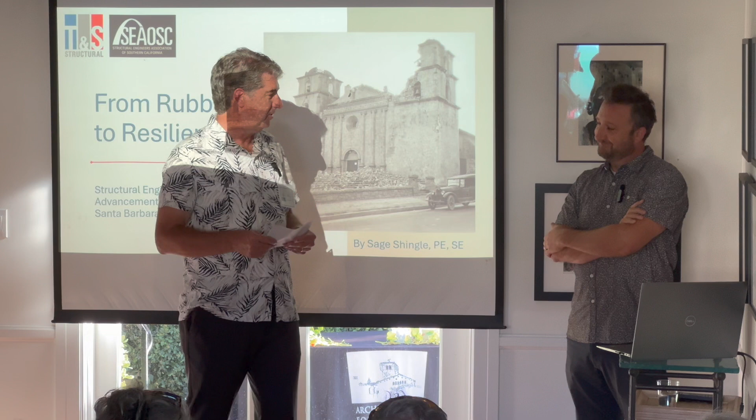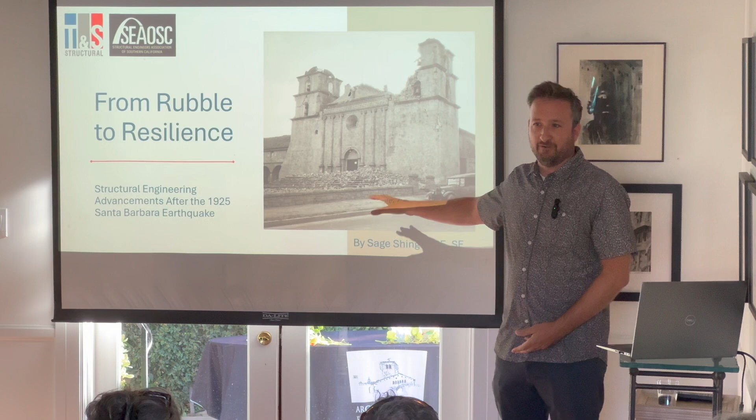All right, thanks, Greg. He mentioned there's no equations in this, but there is, I think, one. We're going to gloss over it for the most part. But a couple quick points of clarification on this. There's a ton of smart people that went into the background of this, right? I'm going to mention a couple, but there's so many people that have been involved in so many levels, so many years. So I'm going to just mention a couple, but that's it. There's so many.

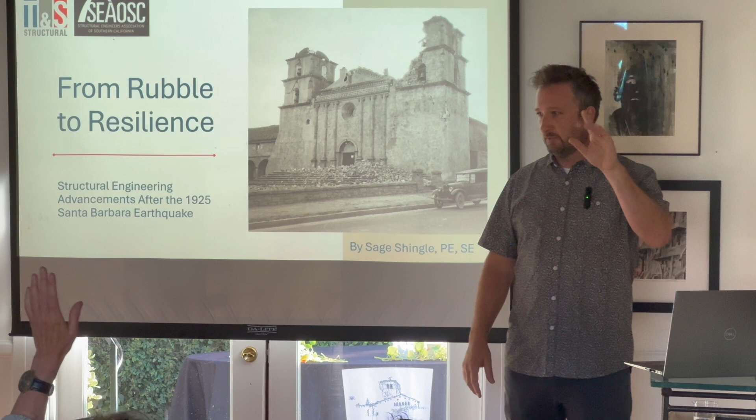Another thing here, I need one quick volunteer. Super strong. First hand. That was the first hand. Okay. So this is just a block of stone. You just have to hold it over your head for a little while. You can actually hold on, just verify that it's heavy. Let the crowd know. It's pretty heavy. It's 50 pounds. I actually weighed it last night. Oh, is that all? That's all. So that's gonna be important later in the show.

We do have a bunch of slides to get through, so we'll try to not linger at stuff. Otherwise, we'll be here for like 3 hours. But there's a ton of interesting stuff. I try to condense as much as possible. But here's the basic outline. We're going to just set the stage. So we're going to learn about earthquake engineering. We're going to learn about earthquakes. And then we're going to talk about the bread and butter of why we're here, the main event, looking at pictures of the 25 earthquake and why things failed, what went into it. And then we're going to follow up on how we're doing things different, what earthquakes have taught us over the years, and how we've evolved our building code to really become better engineers.

So Greg told basically a little about me, but I grew up here in Santa Barbara. Been doing engineering for quite a bit. Feel lucky that I kind of stumbled into something I really like to do. We all probably have hopefully a similar story, but yeah, and here's my family. Spend a lot of time with them.

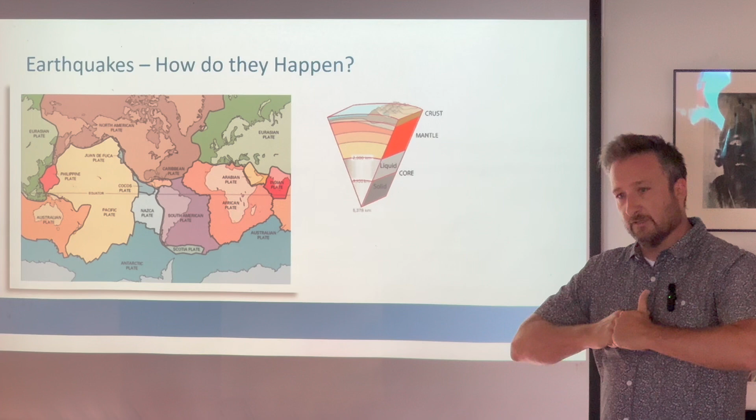So earthquakes, how do they happen? We know that the earth is composed of the mantle, the crust, plates are moving, and so if you think of plates moving as we all started with Pangea and we're moving out from there, you can interlock your knuckles like that and think of plates trying to shift across the knuckles. So as plates move, that's what causes our earthquakes. I don't see anybody doing it, just to make sure I'm right. There's one. So the rock is all interlocked, right? And so it builds up stress as one plate's trying to move by the next one. There's a buildup of stress, eventually released in an earthquake.

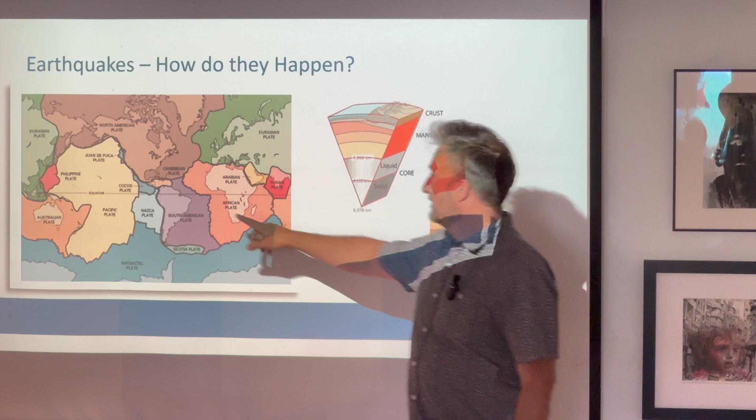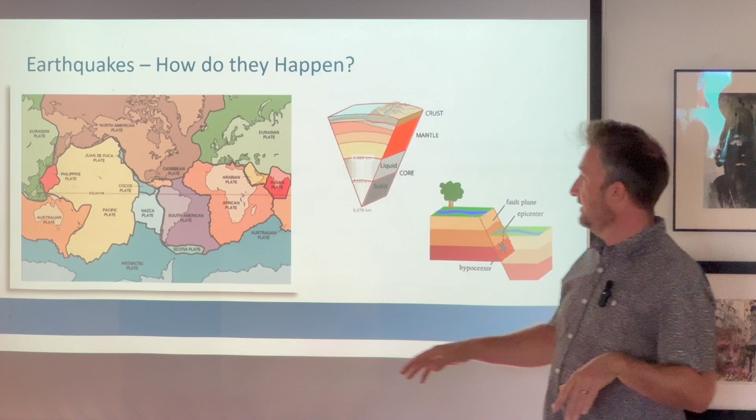So we know that there's fault planes all over the world, and there's actual plate lines. The plate line here close to us is the San Andreas Fault. So we're obviously right here. So maybe somebody's heard that in 10 million years, Los Angeles and San Francisco will be neighbors. So we're moving north because we're on the Pacific plate here, moving that way, versus San Francisco going that way.

So how do we know where earthquakes started? So there's two kinds of waves that earthquakes produce. P waves, which is just primary waves. So P is primary, super simple. And then S waves, the secondary waves. Again, super simple. But P waves expand and contract or pull the soil kind of like a slinky. My son told me that when I was telling him about this last night. So pulling a slinky and pushing a slinky and expanding it. And then S waves move the earth sideways and up and down.

So a P wave is faster than an S wave, which is actually an important thing. So if it takes 6 seconds for a P wave to get to you from an earthquake, it takes about 10 seconds for the S waves to get there. So there's a little bit of lag between when the first waves get there and the second waves get there. And the second waves are the ones that cause the majority of the damage.

So here's, seismograph is basically a measurement of how those waves are hitting the site. So you get your first primary waves come through, and then the secondary waves, and you start to get a big jolt. So that's kind of how we actually started to have seismometers across the West Coast, and then we can triangulate, knowing how long it took an earthquake to get to this point from this registry, same thing from this, and we can kind of figure out where it actually came from. It's super technologically advanced now, but that's the basis of it.

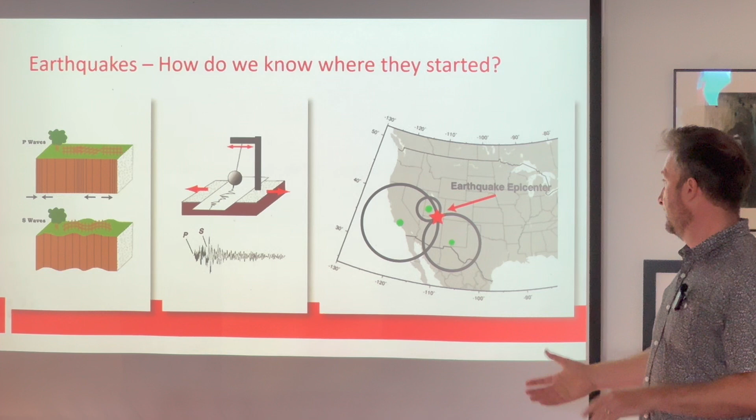And that P wave versus S wave, the primary versus the secondary, is actually something that we're now using to provide a slight early warning. So you can go to California's earthquake website and find an app you can download, and it'll give you a warning similar to the fires that we're doing now. And so it's not a predictor, right? It's not going to predict that we're going to have an earthquake in San Fernando in 2 days. It's a quick reaction, but the thought is this: because seconds matter, right? So if you can get a 5-second lead and be able to get to somewhere safe, then it may make a difference.

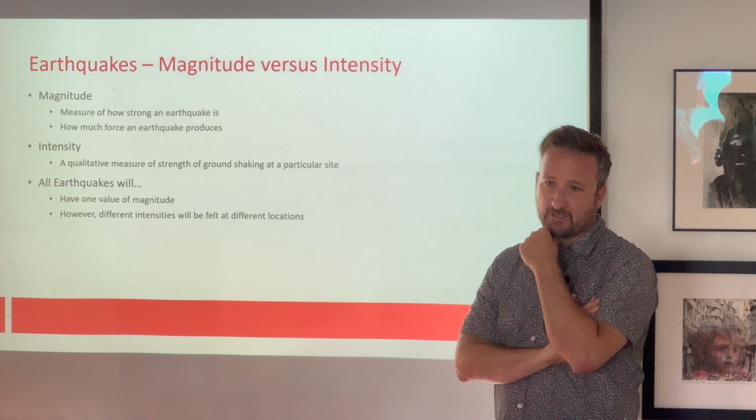So earthquakes, all earthquakes have a magnitude. This is what we're all familiar with, right? So when you hear an earthquake, you think, how big was it? That's the Richter scale, the moment or the magnitude of the earthquake. That's how strong the earthquake is, and how much force it produces, how much force it generates. And then all earthquakes have intensities as well. That's actually kind of a measure of how each site feels it. So one earthquake, maybe in Ventura, has a magnitude, and that magnitude is the same regardless of where you are, but the intensity varies. So if we're close to the earthquake, we're going to feel it a lot more than if we're in San Francisco.

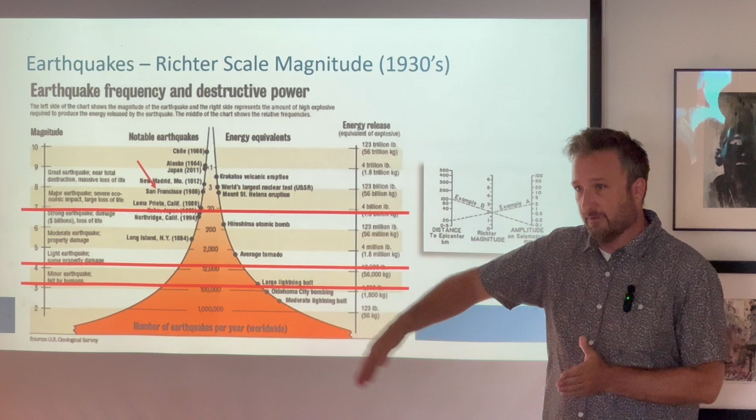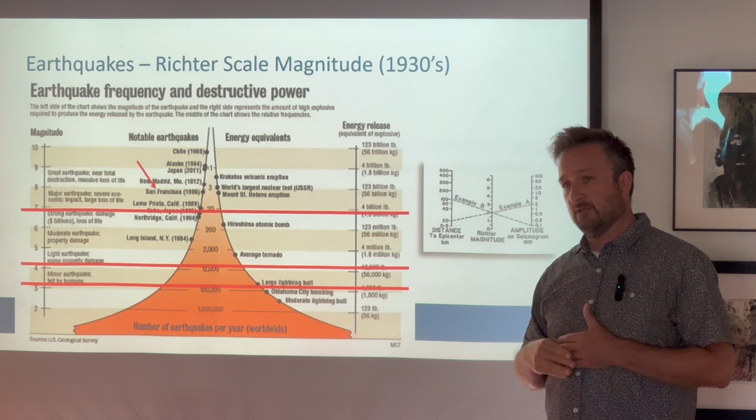Talking about the Richter scale, the older way it was done was basically measuring the amplitude of the shaking and how big that was. They would look at that and figure out how far away the earthquake was, and that's how they would dictate the magnitude.

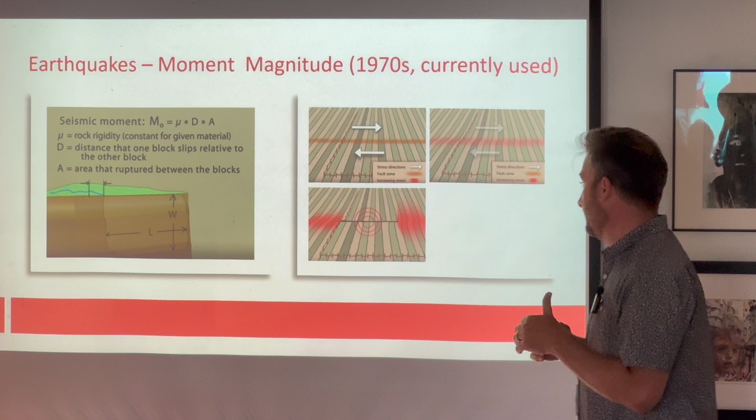They want to move, they build, they're getting stronger, they start to see a little bit of movement maybe, and then all of a sudden there's a release. That release causes the earthquake. There's an area that the earth actually shifts, so how much area shifts is how big the earthquake is. It's really the amount of rock, soil, whatever it might be that we're shifting.

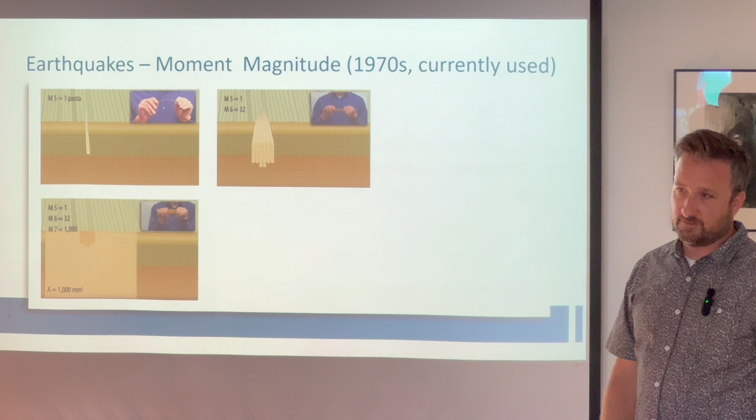Going up to a magnitude 7, we're talking about 32 times the already magnified 32, so we're up to 1,000 times what we started at. None of us have probably done this in the kitchen. Then jumping from a 7 up to an 8, now we're talking a ton of energy to try and break through.

Going up to a magnitude 9, which was the very tip top of that prior diagram, that happens just every once in a while, not often at all. I think in the roughly 250 years we've been tracking earthquakes, there's been about 15 magnitude 7 and up earthquakes in California. That's not earth-wide, but it certainly gives the idea that they're rare.

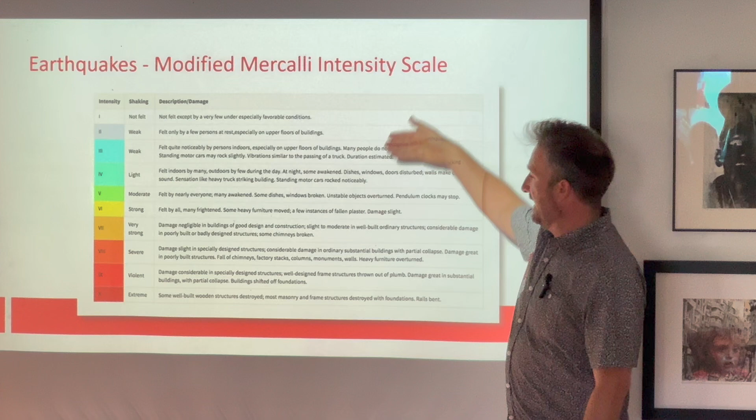The other thing we mentioned was intensity, the intensity scale. This is hard to visualize, but basically as you go down this list, it starts to get more violent, more severe. At the top of the list, it's 'we didn't feel it,' and then it increases from there.

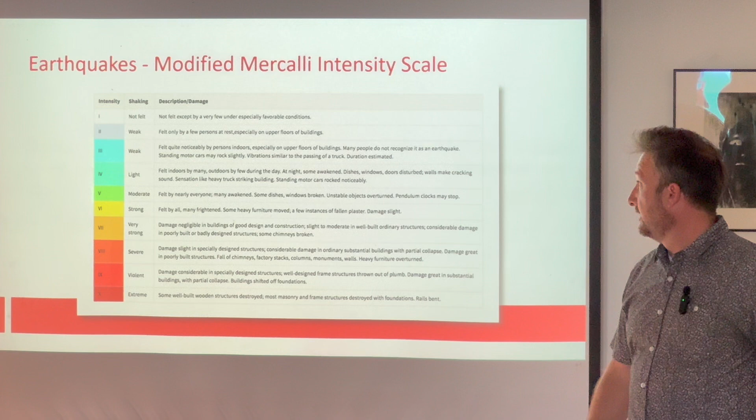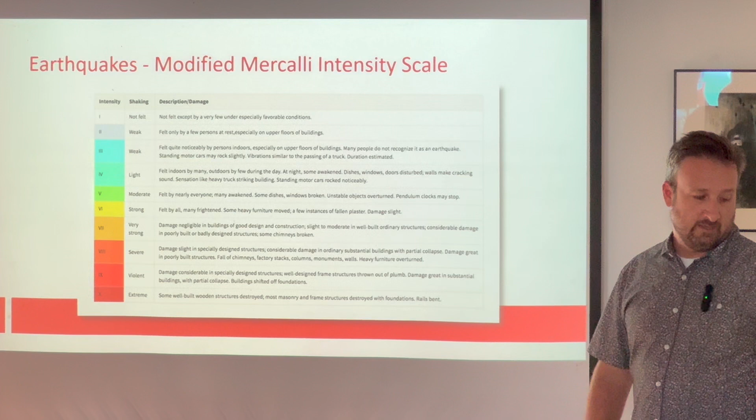This is actually used by the USGS website now, so anybody after any earthquake can go in and check how they felt the earthquake. It provides a lot of information.

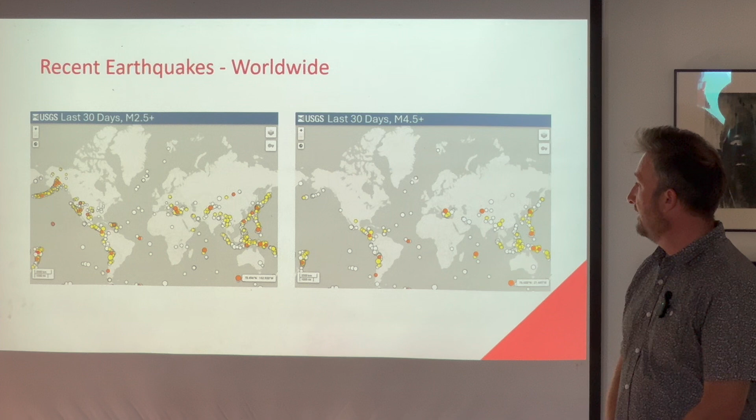Here's the United States Geological Survey website, anybody can go do this. So tonight, you guys can go look at the last 30 days from last night, this is how many earthquakes there were that were magnitude 2.5 or above. 2.5 was about that threshold where we said that's where you start to feel it.

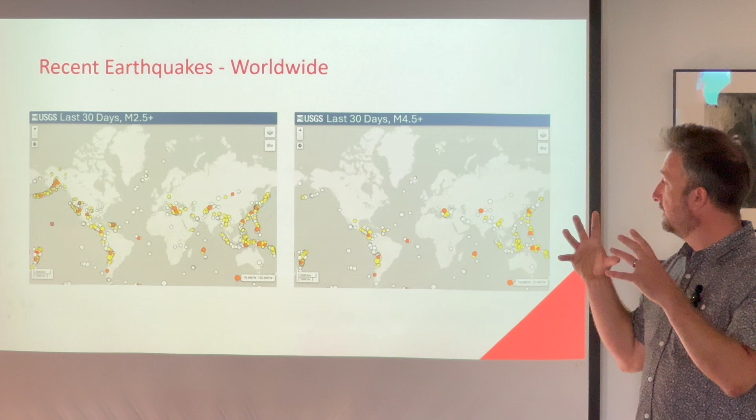In the last 30 days worldwide, number of earthquakes at magnitude 4.5, that's where you start to see some minimal damage. The color coding here is new is orange, not quite as new is yellow, and older is white. The size of the dot is the magnitude, as it gets bigger, it's a bigger magnitude.

So here's the West Coast, same map, just zoomed into the West Coast. This is all of the earthquakes in the last 30 days. This is all of the earthquakes that are feelable, at the 2.5 level. And this is the earthquake that was a 4.5, so at that causing damage level.

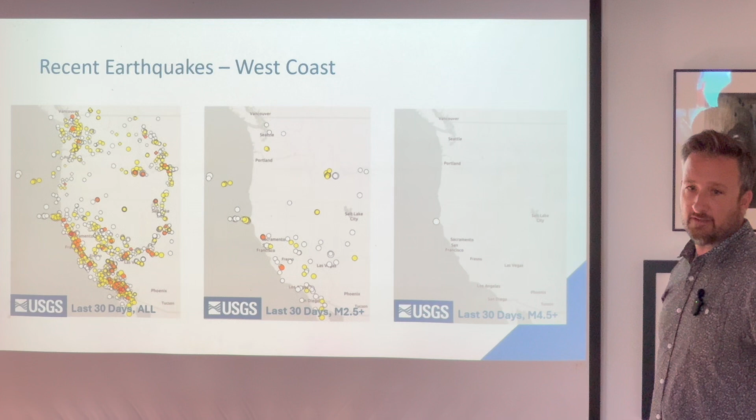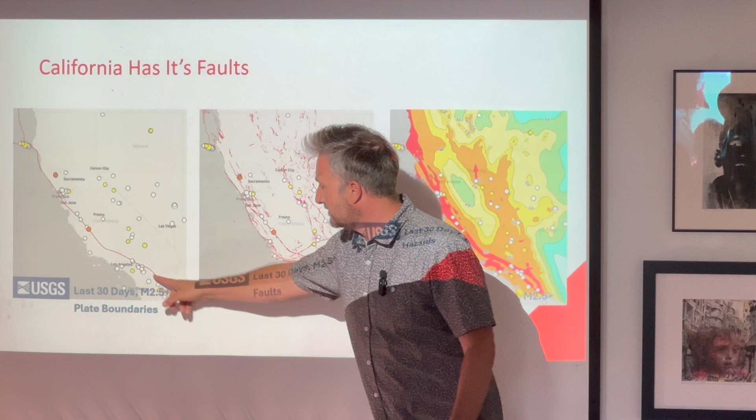A wise man once told me that California has its faults. This is the San Andreas Fault, this is the plate boundary. So this side is moving this way, this side is moving this way, going past each other. And then this is actually the faults across California, a big concentration along that San Andreas, but a ton scattered as well.

Over the years, we'll see a slide a little bit later that's a bit more dated showing how we used to look at earthquakes, but this is a current map that takes into account how close you are to earthquakes, to be able to design for an earthquake. So what these numbers are, percents of gravity, so if I'm holding this, right?

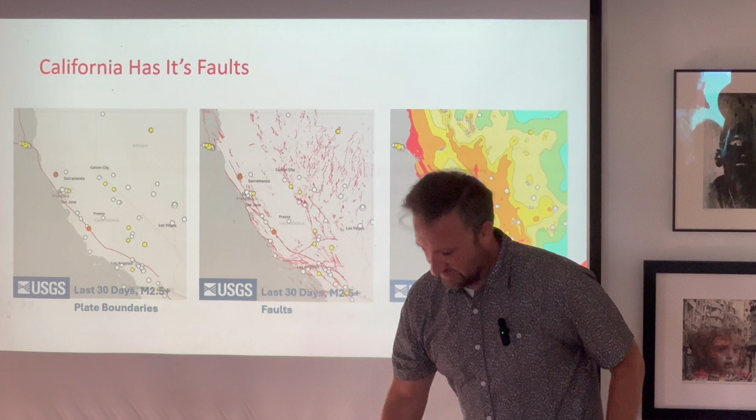So I'm holding this, and I'm holding 100% of gravity right here. Out in these red zones, you design for an earthquake horizontally at 80% of that force. There's some other numbers behind it, but that's the gist of it.

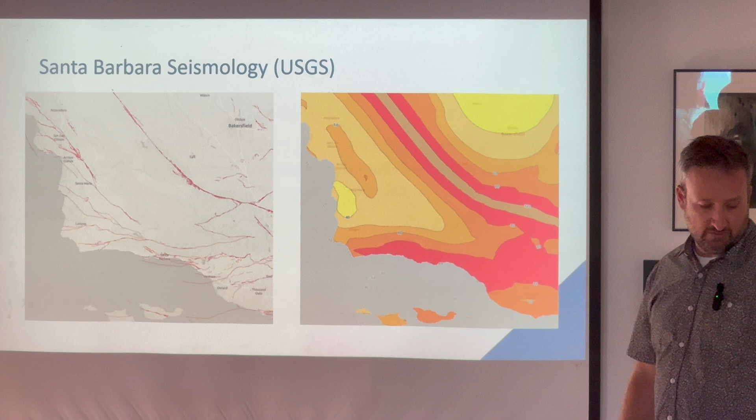As you get further away from the faults, we get down into smaller regions where there's not as much acceleration of the ground. So here's a zoom in specifically on Santa Barbara. Faults are around, and we're designing for big, heavy forces that are amongst the biggest in the nation.

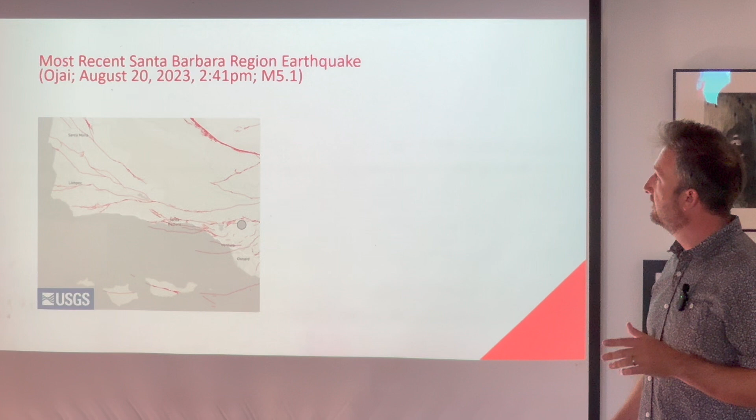If anybody remembers, this is the most recent decent earthquake in the Santa Barbara area. It was in Ojai in 2023, in the afternoon. I don't know what day it was, but you could feel it here in Santa Barbara. That earthquake was a 5.1.

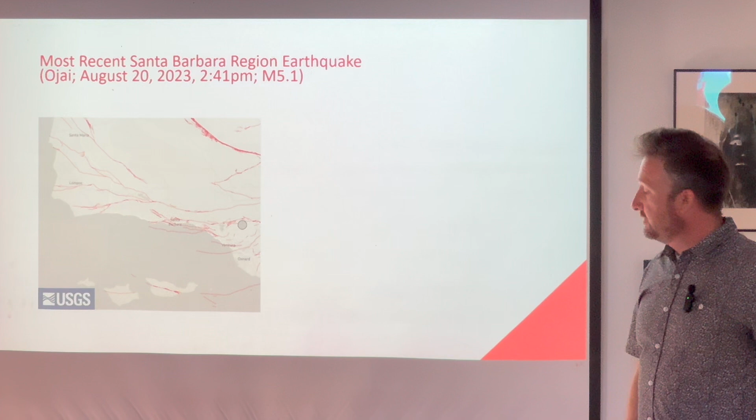So we're comparing this 5.1 to the Santa Barbara earthquake we're going to talk about, which is 6.8. From 5.1 to 6.1 is 32 times more energy, and close to 7.1 is 1,000 times more energy. So this is still at the level where you can feel the earthquake, and you can see maybe a little bit of damage, but not that substantial.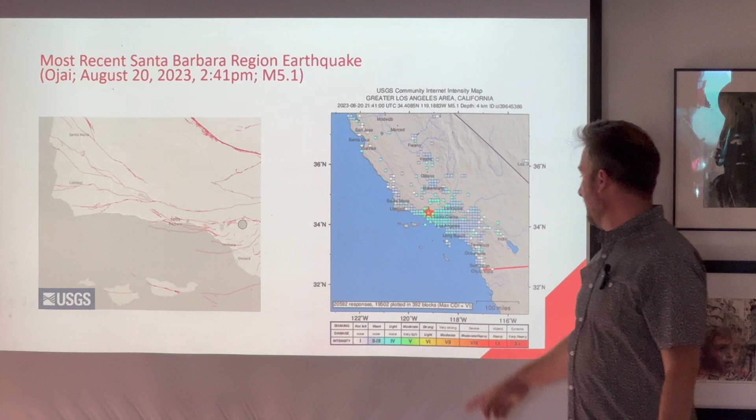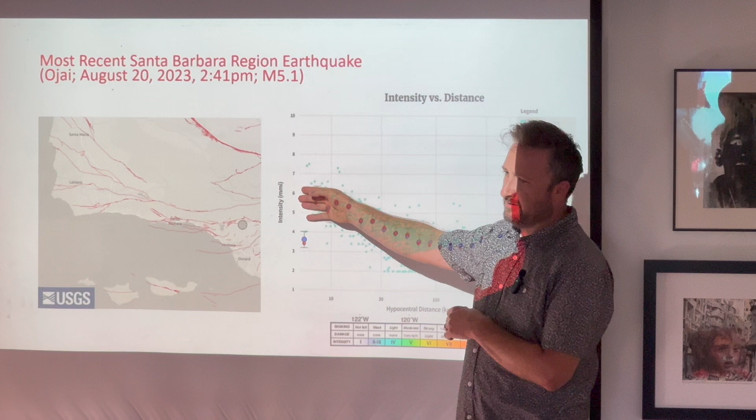This is a diagram taking all those points, all those people who entered their information, and cross-referencing how far they were away from the earthquake. So this is the distance from the center. All the people closer to the center felt more shaking, and this is how intense they felt it. When you get far away, they felt it not so much. They do this for every earthquake—if it's big enough for people to feel, it's on the website.

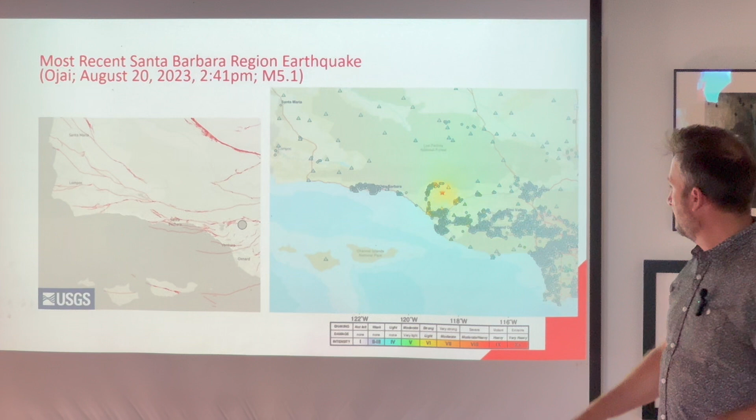Here's another diagram of it. But the cool thing about this, I think, is all these triangles. All the triangles are actually seismometers that register and pick up the data. All the dots are people, you or me, with a phone.

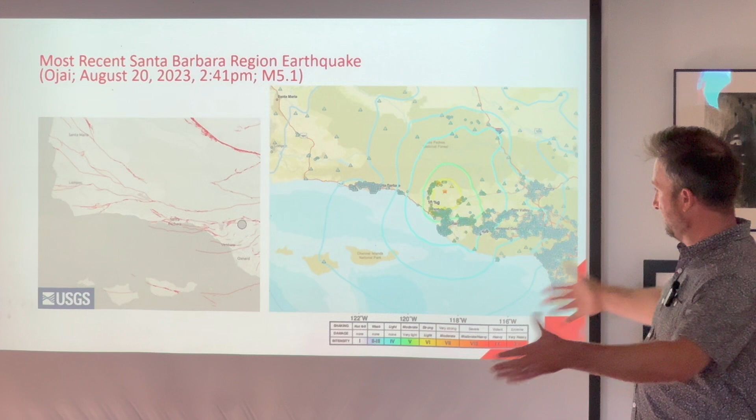Okay, so here's another guy, a lot smarter than me: Isaac Newton. Sir Isaac's first law of motion says an object at rest tends to stay at rest. Second law of motion is force equals mass times acceleration. So we talked about the mass—I'm not going to pick it up again—but we've got the mass, and the accelerations we were just talking about in the earth, how much it shakes.

So the way we're designing for earthquakes is taking the mass of a building and then applying some horizontal loads to it, some horizontal accelerations, to get the weight of the building and how fast that mass is moving, which gives us a force to design for. So here's your quick 30-second how-to-be-a-structural-engineer.

The earth shakes, right? It wants to shake, and so the building is going to move. This is kind of like the object at rest wanting to stay at rest—it wants to stay there until the earth shifts underneath it, and now it has to catch up and move with it. So it starts to shake back and forth like that as the ground is shaking.

So what we do as engineers is make sure that the floors and the roofs are tied to the walls around the building, locking them all together, so the floor and the roof will absorb the load and redistribute it to the walls, which take it down into the earth. That's the very basics of it. There's a ton more than 30 seconds' worth, but that's enough to understand where we're going later in the slides.

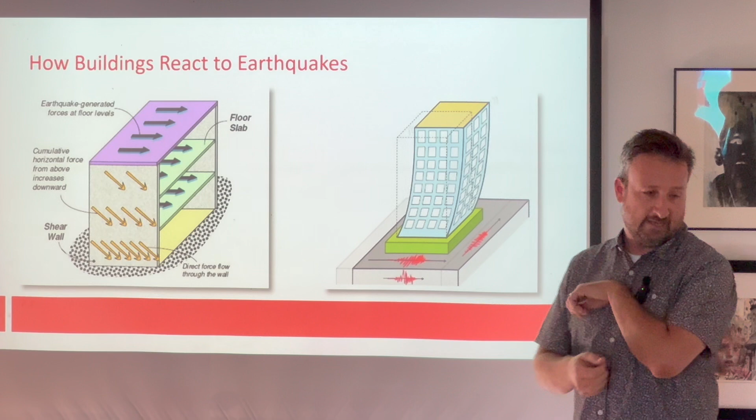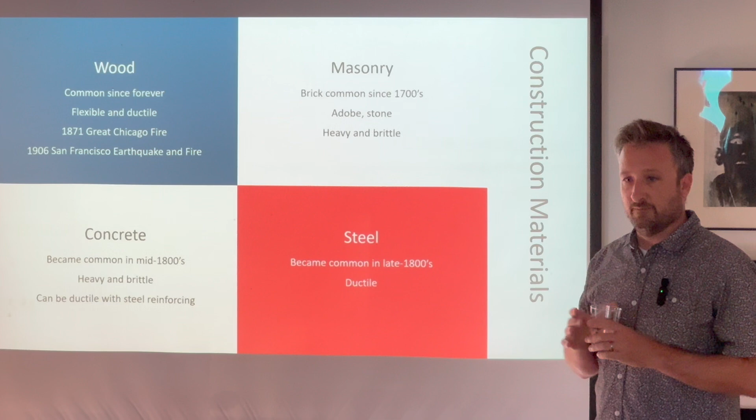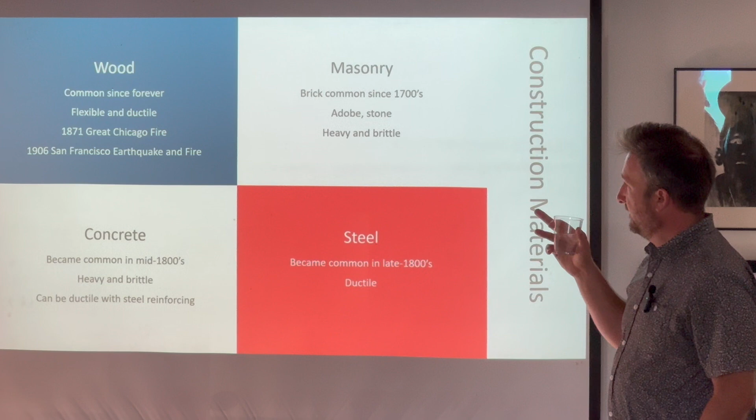So, talking a little bit about materials. These are our typical construction materials. Wood, everybody's been using it since we could make huts. The nice thing about wood is it's flexible and can be ductile up to a point.

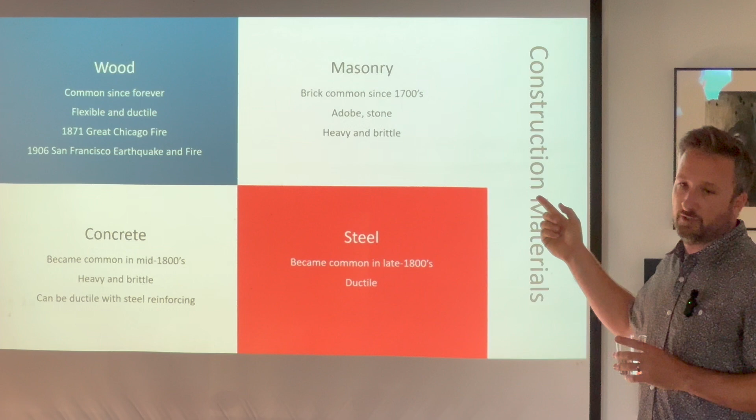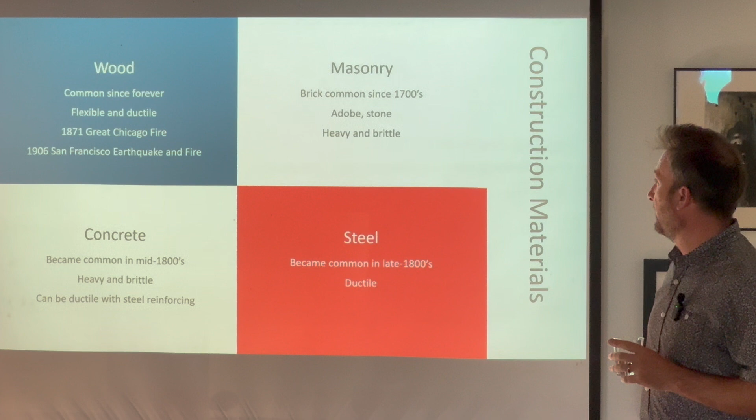But the bad thing about wood is big fires. If you think about people moving west, settling in a town, it was first wood structures, and then we got some affluence, into the gold rush, and we start to get masonry, big brick or stone buildings. Stone is a lot heavier, adobe here locally, and brick was common, but masonry is heavy and brittle. So if it's going to break, it's going to break, and it's going to break fast.

Concrete is similar in that it's heavy and brittle, but you can reinforce concrete with steel, making it a lot more ductile and able to dissipate energy. Steel, we didn't have a lot of in the earthquake, but it's a material that can be ductile if it's designed the right way.

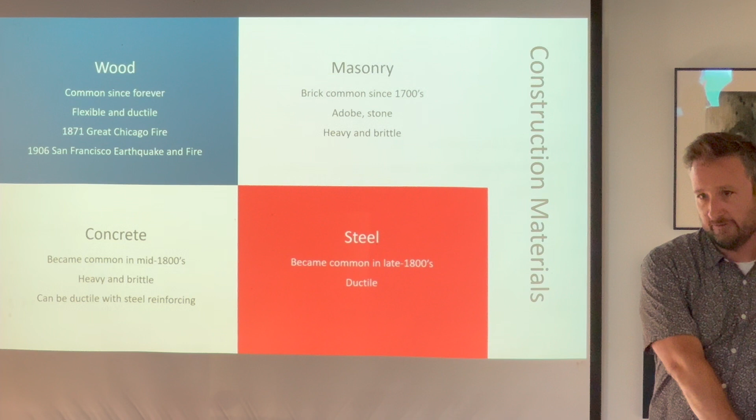Okay, so that was all the background. Here we go, main event.

Looking at the earthquake: the Santa Barbara earthquake was June 29th. Greg mentioned it was at 6:42 in the morning, which is an important thing actually. The magnitude was 6.8, so we're pretty high up on that ramp.

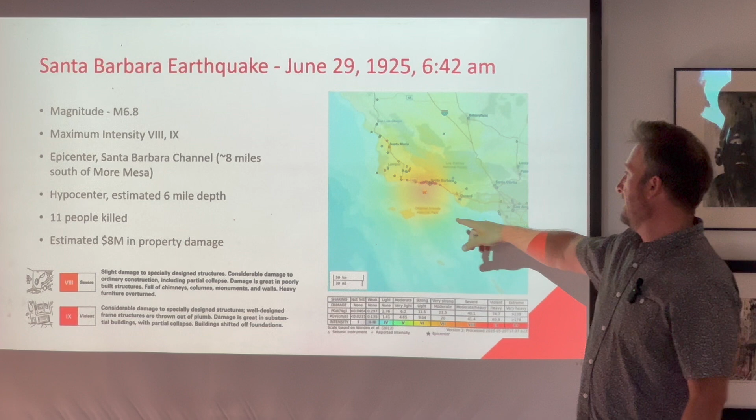So the epicenter is 8 miles south of More Mesa. You go out on the More Mesa Bluffs, and 8 miles south of there. And then the hypocenter, which is just how deep it is, was about 6 miles deep out in the channel.

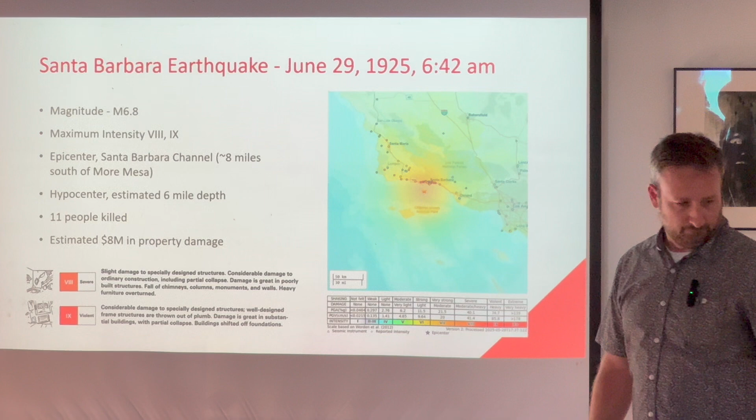I mentioned that seismographs weren't actually developed and used until the 1930s, but there is a recording of the Santa Barbara earthquake from a temperature measuring device from the Southern Counties Gas Company. You can see there was a little disturbance in the middle of the night, around 3 a.m., 3:30. Then here's where we get to the big activity, which was at 6:40. It's kind of neat to be able to actually see it.

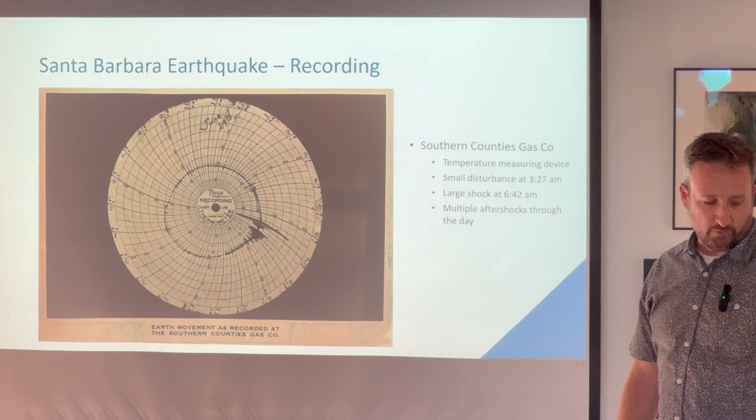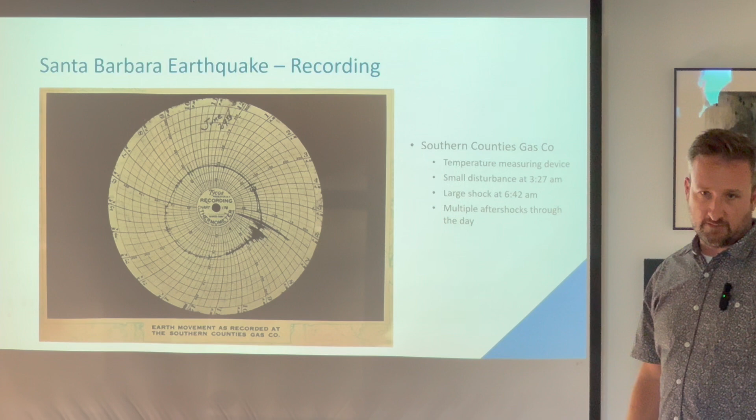That 6:40 timing was important because the downtown corridor really saw a majority of the catastrophic damage. But not as many people were living in the industrial or commercial space, so they were at home. We'll see some damage to residences, but they weren't as catastrophic or life-threatening.

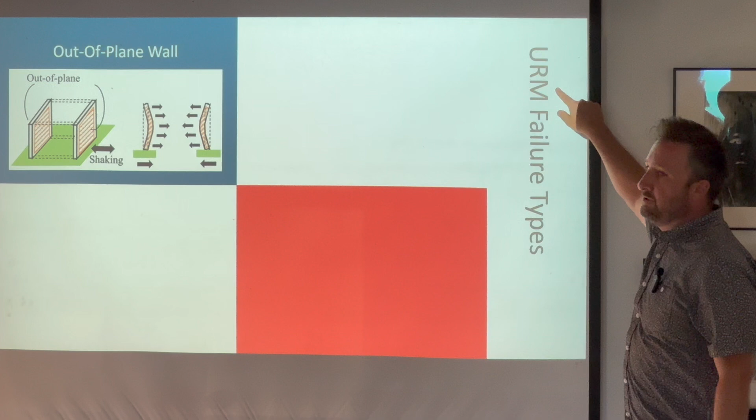Okay, so we're going to talk about URM—this is a big thing. Unreinforced masonry is what that stands for. So that's brick, stone, adobe that doesn't have steel rebar reinforcing it. Here's a quick primer on the types of failures we're going to see, because we're going to see a lot of them over and over.

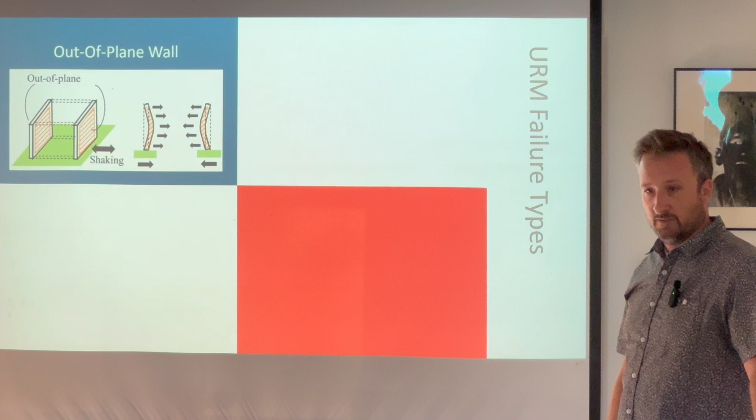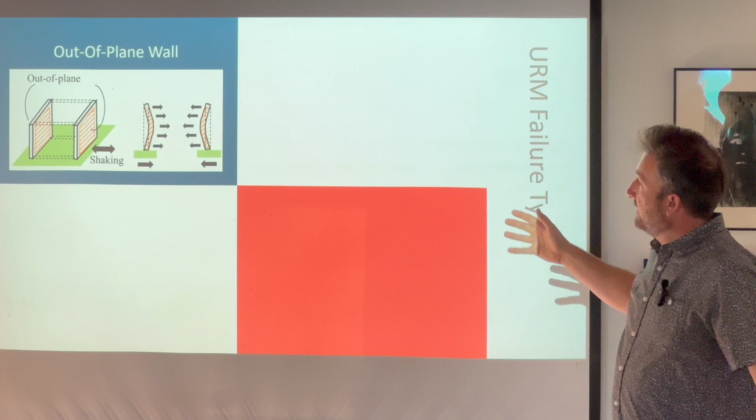Out-of-plane wall failure—that's a wall like this one behind us. It's attached to the floor and the roof, and it shakes out of plane with its own weight. A masonry wall is really heavy, so it shakes, pulls away, and fails. Out-of-plane anchorage: the wall is attached to the floor and roof, and if it's not attached well, it can pull away and lose support of the roof.

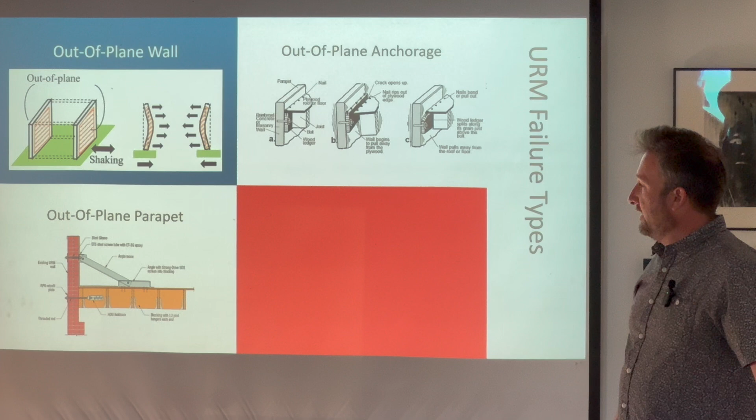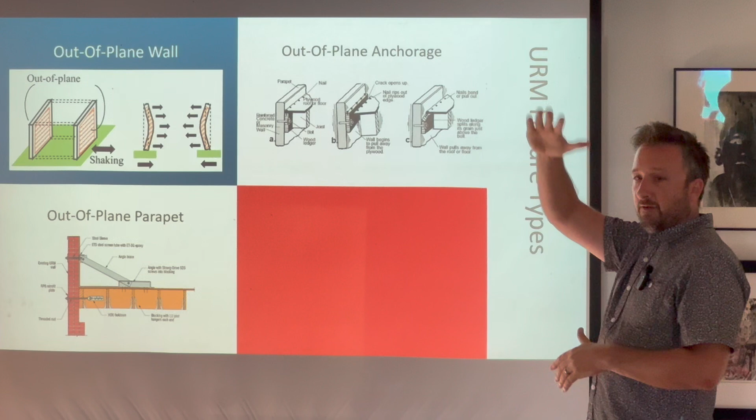Out of plane parapet - so the parapet is on the flat roof, and there's a wall that comes up above the roof. In some cases, the wall is below the roof, but in this case it's up above the roof, just hanging out there, waiting for an acceleration to send it over its edge.

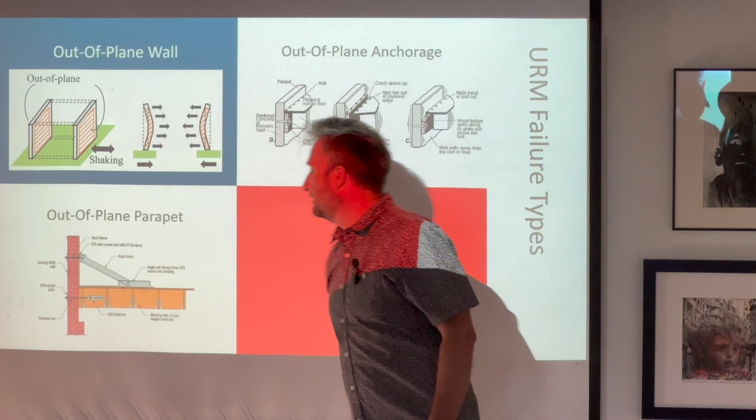So we'll see a lot of those out of plane parapet failures. This is actually showing retrofits. We'll talk a little bit about retrofits later, but basically what you do is come in and make a strong connection to the base of the parapet, and also tie the floor or roof really well to the outer wall - that's the retrofit.

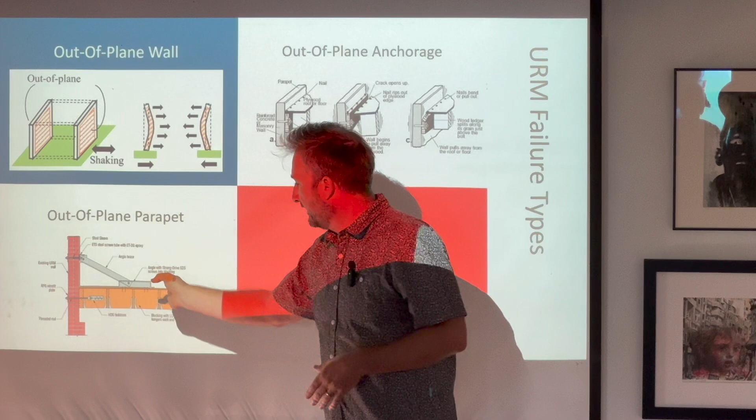One thing to pay attention to would be these joists - this would be like the rafters in your roof. They run either parallel to the wall or into the wall. If they run into the wall, then the wall is what's supporting the roof.

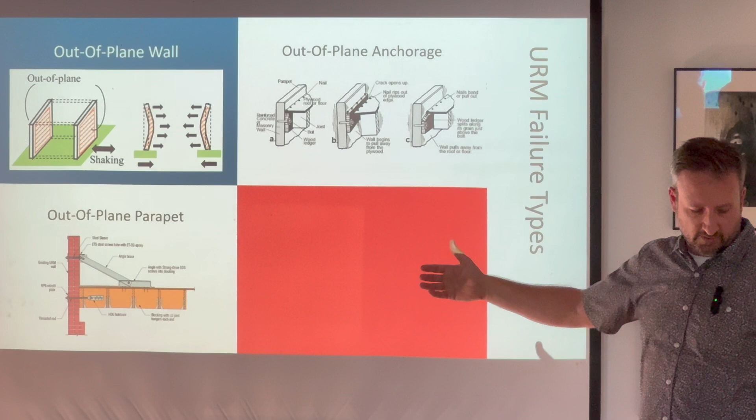And then in-plane shear - this wall has done its job bringing the load up into the floor, which brings it over here, and then this wall shakes kind of in plane, and that overall is what resolves the forces in the earthquake. You can see diagonal cracks - we'll see a lot of these as well. That's the wall racking back and forth, creating that diagonal cracking.

This was shared with me - this is really cool. After earthquakes today, people go out and survey the damage and try to learn something. That happened in the days following the '25 earthquake as well - a handful of engineers came and looked over the damage and made some observations.

I'll read this for you: Our inspection of damaged buildings leads us to the conclusion that much of the damage might have been avoided if better material and workmanship had entered into the construction of the buildings affected by the earthquake. Wherever good materials have been properly used and the design has been an intelligent one, slight damage or none has resulted. Brick, tile, and concrete block construction have proved unsatisfactory in most cases which have come under our observation. Even so-called reinforced concrete has failed when of poor workmanship or design. As a matter of record, we note the absence, with two exceptions, of steel frame construction - they came through in grand shape.

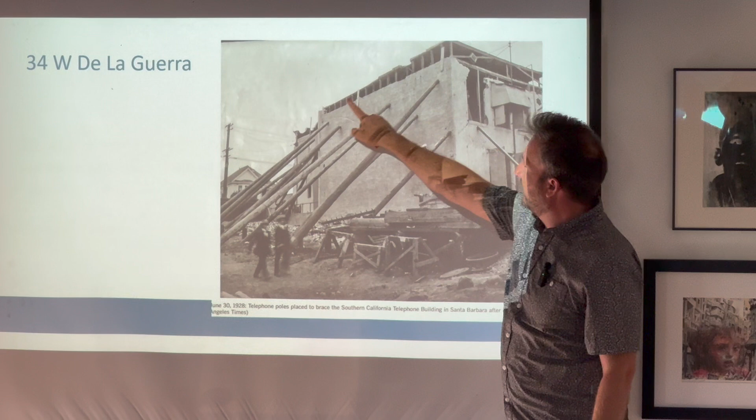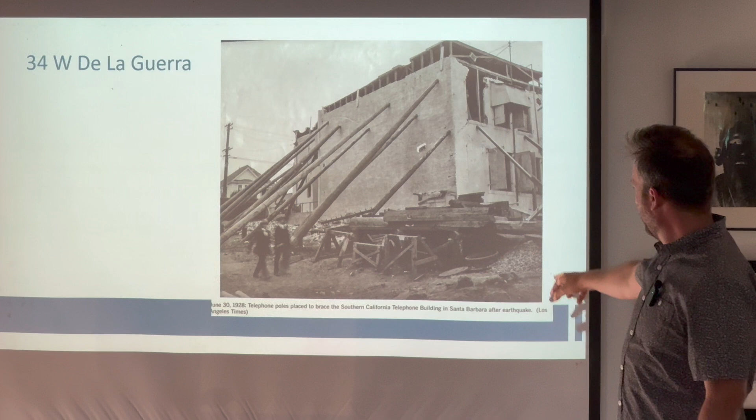So this is a picture of the telephone building. You can tell because it's being propped up by telephone poles. And again, it's the same story, right? So unreinforced brick. Parapet that was up here, that's the top of the roof, is gone. So it's pulled off and fell. Diagonal cracking here. The parapet up here fell. All of the rubble down on the bottom, ready to be cleaned up.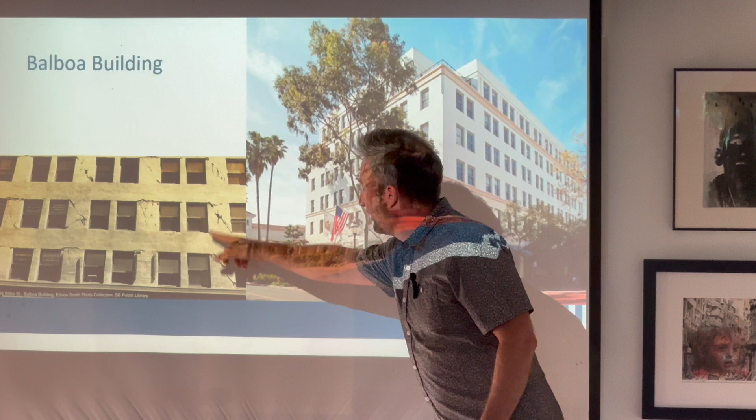So the earthquake jolts a big jolt of energy into the building. And then as it's trying to settle, it needs a place for that energy to go. And so what's happening is it racks back and forth as you get the concrete wall straining one way and pulling a strip out, and then straining the other way and pulling another strip out. So you see these very regular X's across all those types of piers. But again, the building stood and it was able to be repaired, and it was built well.

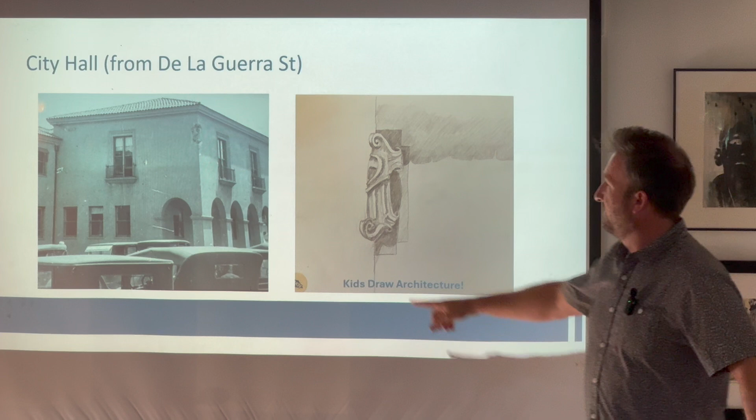Here's City Hall. Most of you guys are kids at heart, I'm sure, but maybe don't go to Kids Draw Architecture. Really neat program, and this is my drawing from this last architecture. And I was excited to go back and actually see the City Hall with the shield on the corner from it, so I had to put that in.

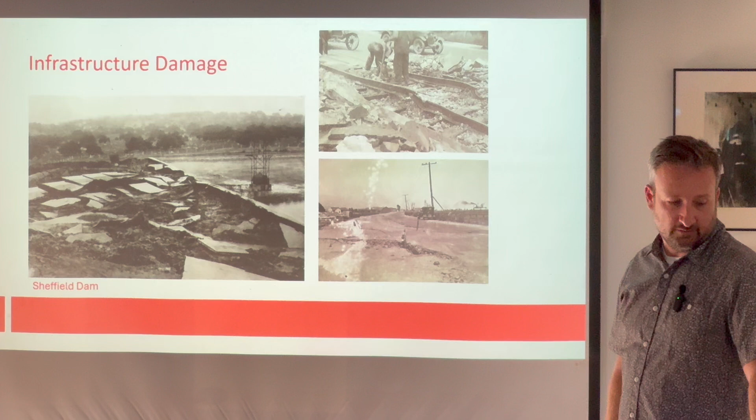Okay, so now we're going to follow up on what we've done, how we've adjusted, and where earthquakes have taken us.

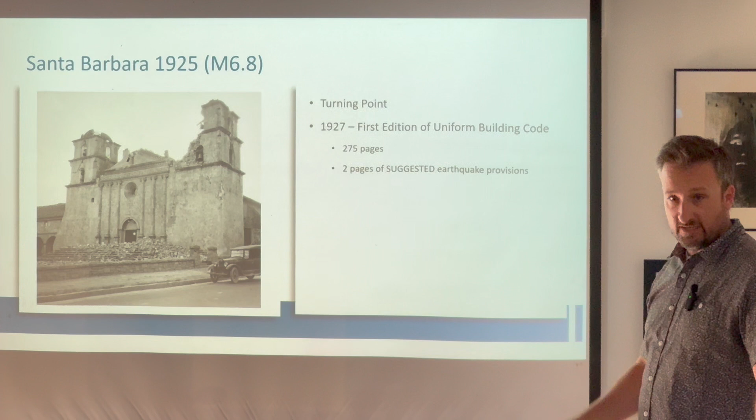And it was 275 pages, and there were 2 pages of suggested earthquake design. So I highlighted suggested right there. So all you had to do was this little bit. But it was the immediate impact or the recognition that we need to actually design for earthquakes, and it's kind of a cool thing for me as a structural engineer to think that the earthquake from here started this movement of actually designing for earthquakes.

At the time, it was very simplified design, and you just take 10% of the weight of the building and then design it. We've escalated that quite a bit.

Long Beach, 1933. So this earthquake is really important. Again, you look at the time. So it was 6 o'clock on a Friday afternoon. Timing was great because it significantly damaged a bunch of heavy unreinforced masonry schools. And so elementary schools, middle schools, high schools all had damage similar to this, but being Friday at 6 o'clock, no kids were there.

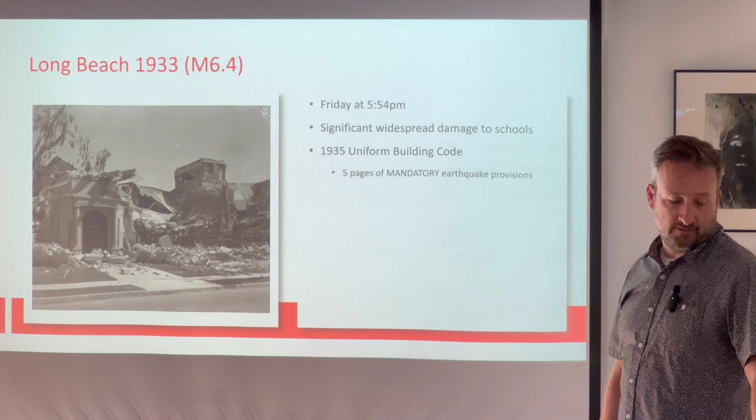So the immediate reaction was that the DSA Field Act was created, which was you needed to survey basically all of the schools, and from that time forward, schools have kind of been put on a pedestal. So all public schools are specially designed. There's a special agency that reviews everything, and they basically went through and ensured that unreinforced masonry was removed from schools.

And again, this is the big damage maker—not the only one for sure, but definitely low-hanging fruit.

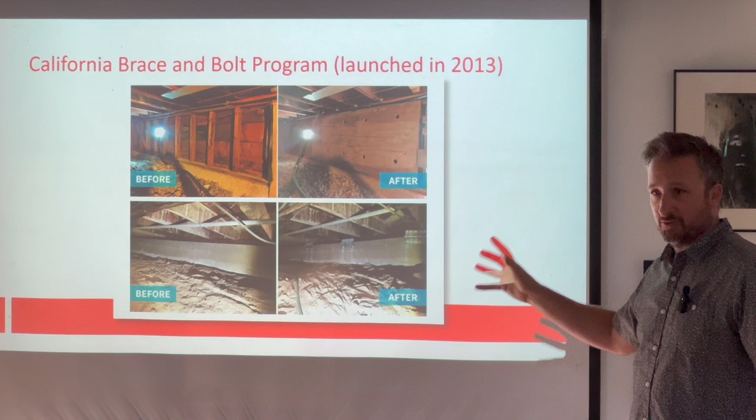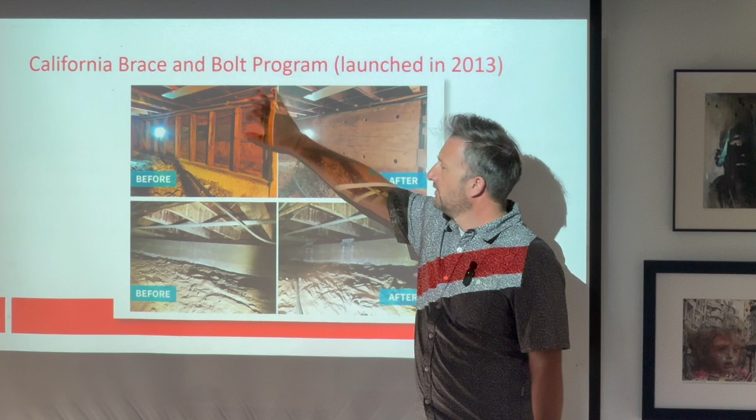For residences, California has a brace and bolt program, established in 2013, and it's a very simple program. This goes back to those residences that just shake off their foundations. The before picture shows no connection between the crawl space—the floor you walk on, the crawl space here, and the foundation below. So adding shear panels in front and anchors down to the foundation locks it in place. That's one of the known, simple causes of failure that single family residences see.

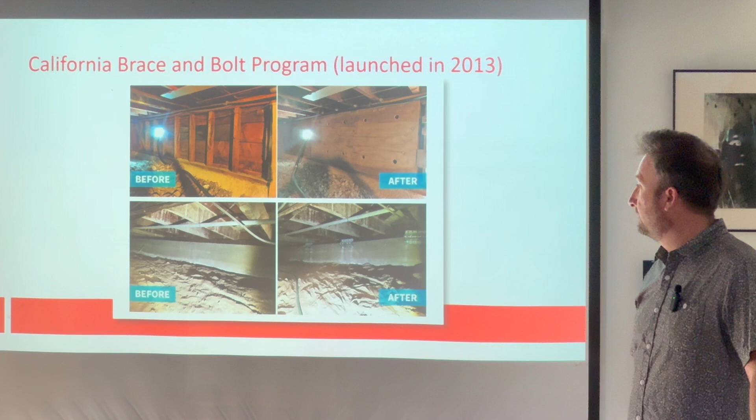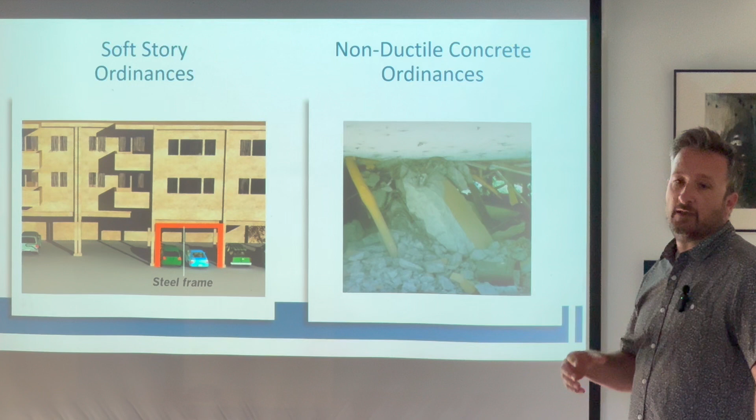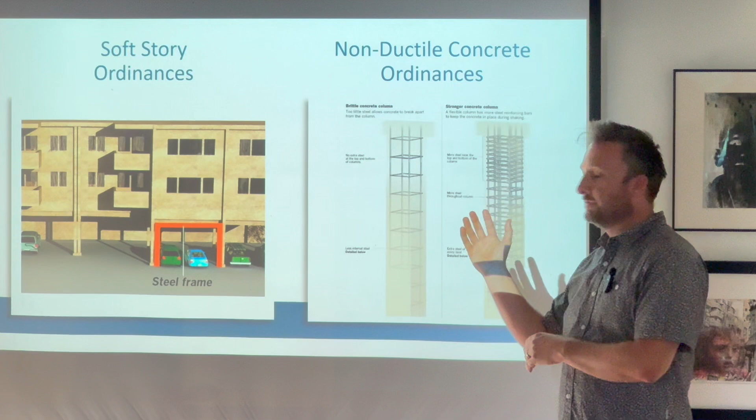So we've learned about non-ductile concrete. This is a bit more complicated, but essentially concrete is really heavy, and if there's not reinforcement placed correctly and sufficiently, it can still be weak. This is what we'd do today in a current concrete column versus what would have been done before. The old way doesn't have the ductility to allow the building to sway and move, whereas this allows you to do that. So what could happen is that type of collapse.

Some building departments have a mandatory ordinance for non-ductile concrete—Los Angeles, Long Beach, I think Santa Monica.

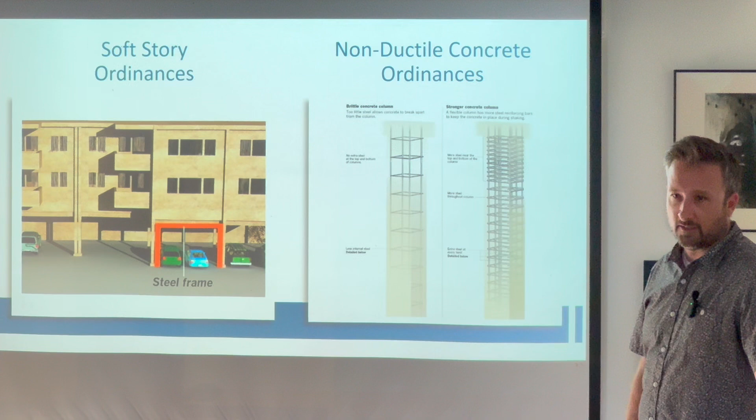Questions? Uh-oh, you haven't mentioned glass. Glass, correct, I didn't mention glass. You can, but we generally don't build much out of glass.

I was thinking of large plate glass windows that looked reflective in some of your early post-Santa Barbara photos, and it looked like in some cases they didn't shatter—is that true? In some instances, I'm sure, though I don't know the details. Glass is obviously super brittle, but now there's a bit of give between the glass and the building, and we use double panes, so there's more flexibility built in. But with a single pane of glass, a big pane, I wouldn't want to be right in front of it.